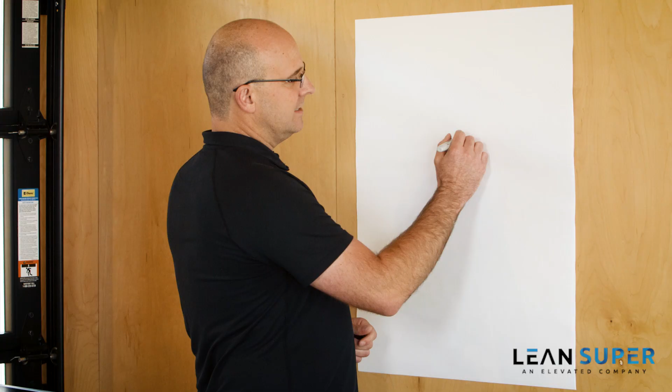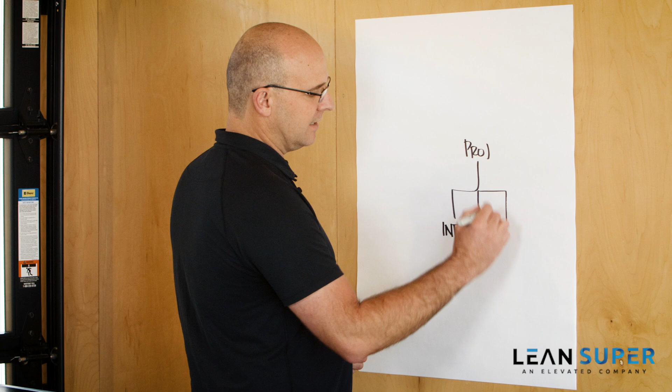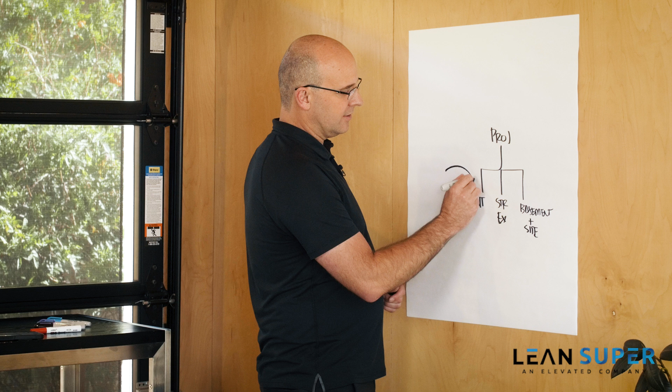So let's say that you have a project and that you have the project broken out in the interiors, right? You have it as structure plus exterior. And then let's say maybe that you have the basement, okay, plus your site work. So all good. So you, as a general contractor for each of these areas, you want to do a pull plan, which I'll just list as PP. You'll want to do weekly work planning, which happens once a week. You will want to do day planning, which I'll do as DP. You'll want to track percent plan complete.

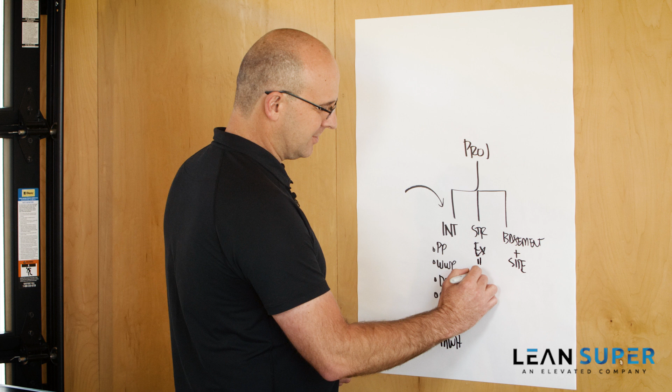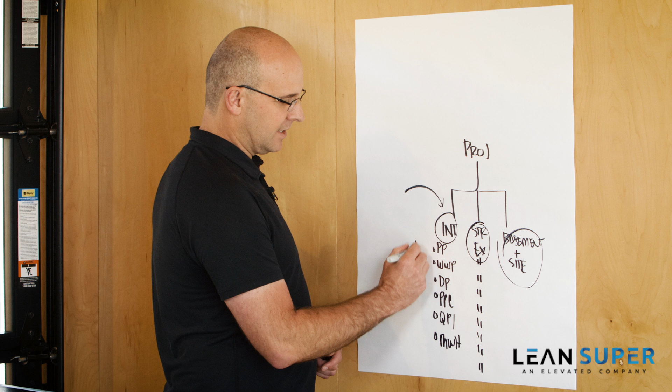You will want to make sure that you have quality pre-install meetings, which I'll list as QPI, right? You'll want to have morning worker huddles, which I'll do as MWH, per functional area, right? And so you want each of these areas to have their own huddle systems. So each one of these areas are going to have their own designated foreman by trades. You want to scale out this information to these individual trade partners, so they're all going to have tablets. And you see where I'm going.

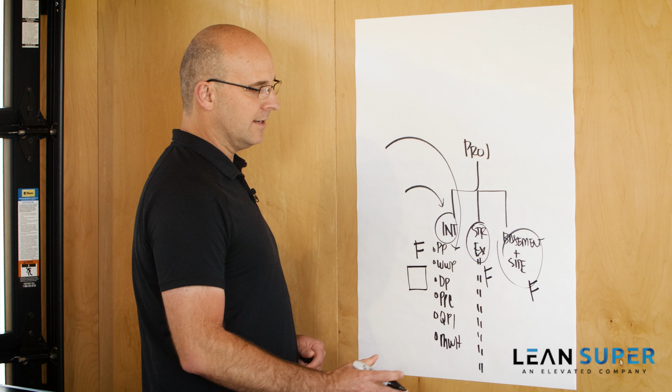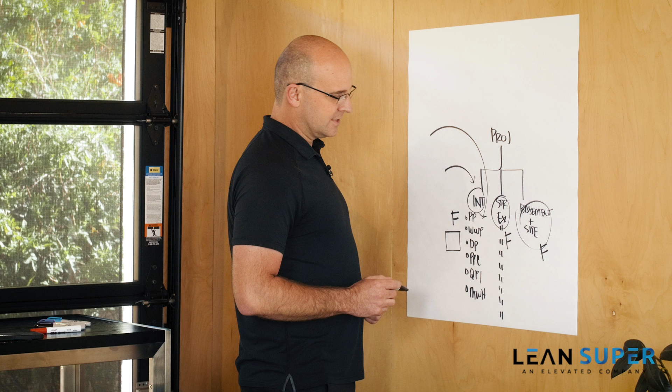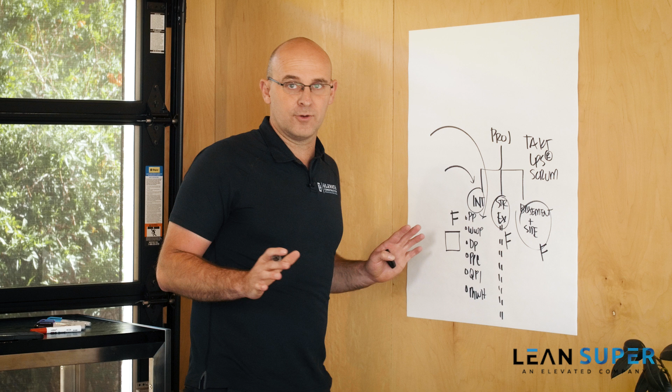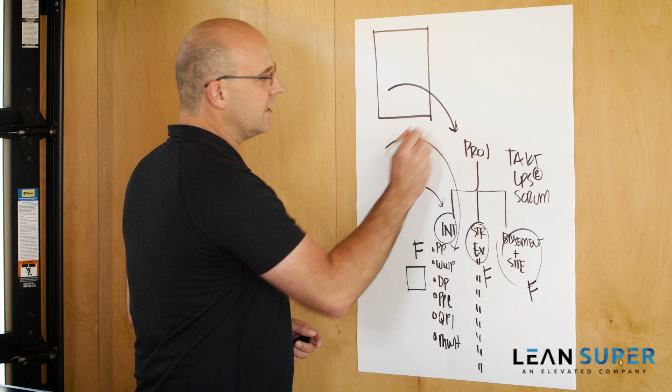I'm going to pause at this point because I don't want to take up your time going through this in too much detail. But the bottom line is, there's a requirement, you have to have foremen separated out by geographical area. Oh, by the way, you're going to be using Takt, Last Planner, and Scrum on the project site. So there's all these requirements. If I'm a trade partner coming in, I'm like, whoa, what is this? I didn't bid 2 foremen for this job. I didn't buy them iPads or tablets, right? What's going on? The problem was we didn't clearly explain early on what things we wanted in their inclusions, or at least as a part of the basis of schedule. So we've got to fix that.

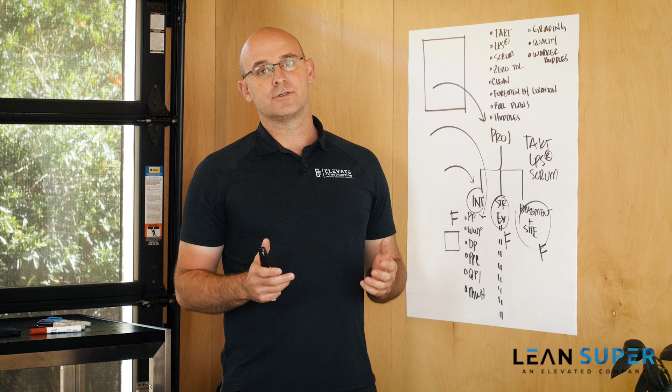Let me give you some common items right now. So I've just listed a few of the items that I would make sure to buy out properly on every project. Number 1, TAKT. Them knowing that they're going to be working on a rhythm and using the TAKT production system, I would definitely make sure that was clear. Number 2, Last Planner System. Knowing that they are going to have a weekly meeting for their look-aheads and weekly work plans and a daily meeting for their foreman huddles is key. The other one is Scrum, knowing that their office teams will get to interact with a Scrum board for any of their critical items by functional area.

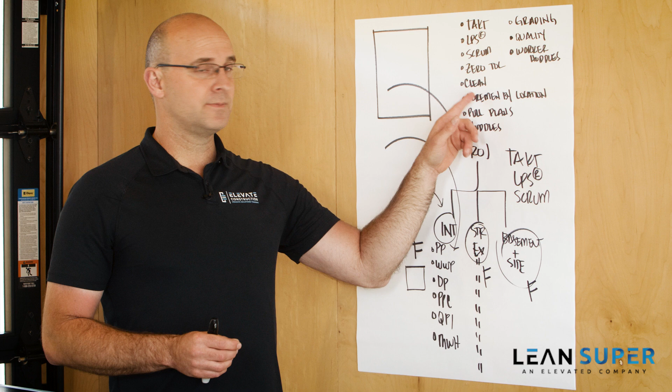Another one is zero tolerance. If we're going to be zero tolerance with safety or cleanliness or organization and deliveries, they need to know how that's going to happen from day one. Another one is cleanliness. The fact that you will not be doing composite cleanup crews and that crews will have to clean as they go, this must be in the contract. Let's say you're a union shop and your journeyman folks are not allowed to clean as they go. The trades need to plan to have those laborers available as they go.

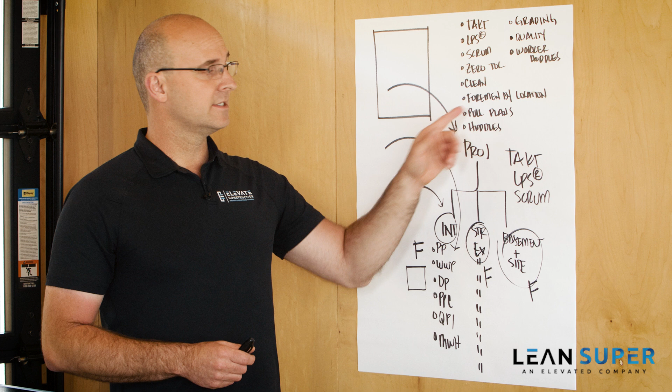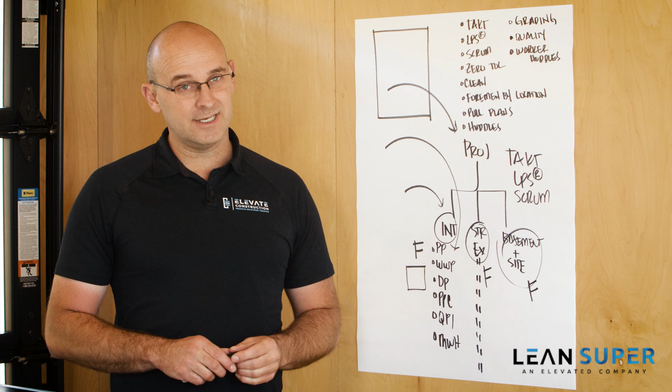Foreman by geographical location. Again, you can't run Last Planner if you don't have foremen or lead persons by geographical area in the right huddles. So this has got to be clearly spelled out in the contract. Pull plans, knowing that these foremen or the super or the PM will get to spend 1 to 3 hours ahead of every phase doing a pull plan, they need to know that ahead of time. Huddles. So I do an afternoon foreman huddle, a morning worker huddle, and then enable and require the crews to do a crew preparation huddle every day. That needs to be spelled out in the contract.

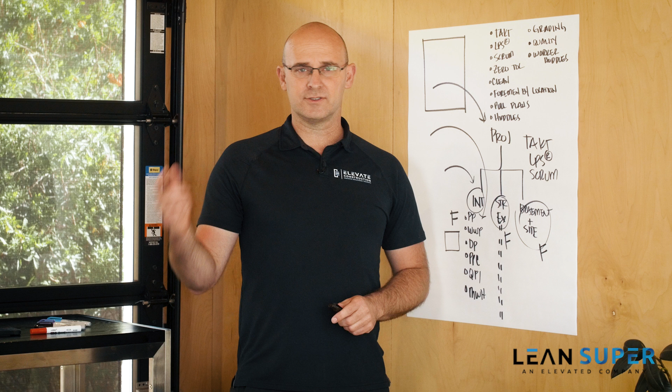Grading. If I'm going to grade all of the contractors on an A to F scale, according to certain criteria, the trades need to know what that criteria is and that they will be graded. Quality. Knowing that the foreman should be in these quality pre-construction meetings ahead of time is crucial. And again, the worker huddles, that's typically something that if you don't spell out, they'll be like, okay, I had 30 people times 10 minutes times 300, you're going to get a massive change order.

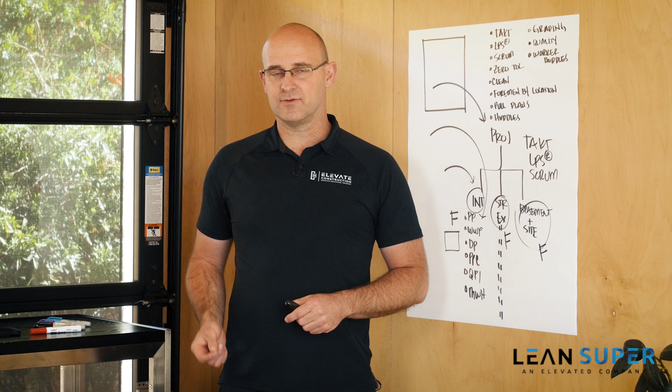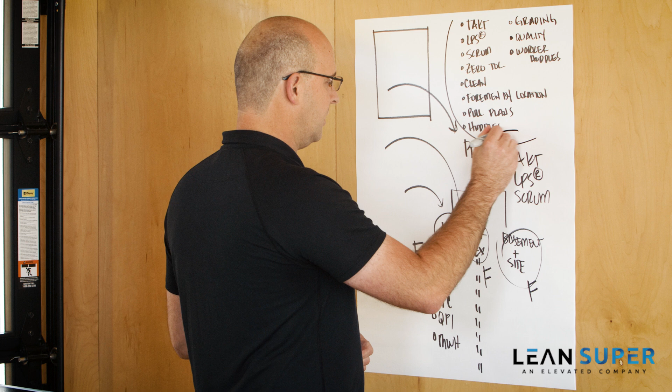Now, I will say implementing lean, I've never gotten a change order and I've never had pre-con pricing skyrocket to where I couldn't afford the job. The key here is about respect. If you're going to do these things, tell the trade partners, have the conversation, because if you don't specify it, then the trades do not owe it to you down here when you want to implement.